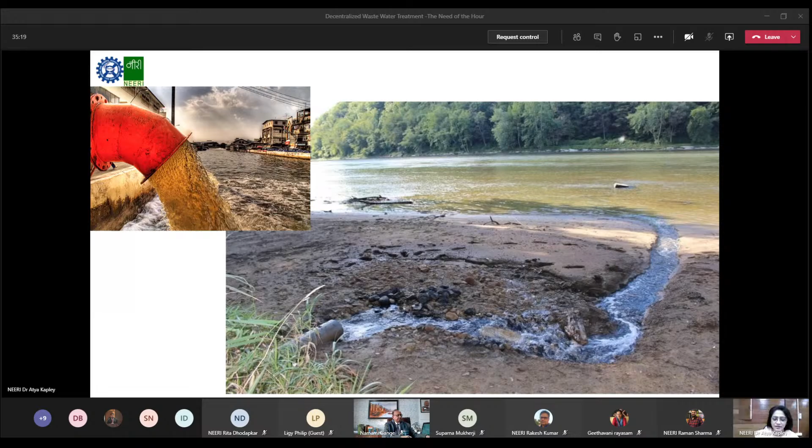But looking at the size, the population, the cost, it's not really a feasible option. And hence, decentralized wastewater treatments are really the need of the hour. We are facing extremely high water stress. We cannot take for granted our drinking water being supplied every day across the country. Some cities are lucky, they get 24/7 water, and in some cities, even the metros get water on alternate days.

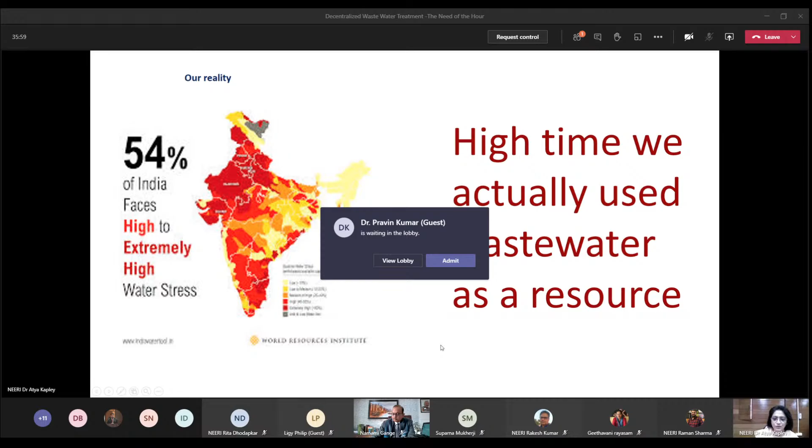So it's really high time that we used wastewater as a resource. Now, this has been used as a buzzword for more than a decade now, wastewater as a resource. But actually taking it into the field is a real big challenge. Now, these are some statistics I got from this website, but it is 2011 data, so I'm sure it is updated now. But you can see from this picture that most of our states do not have enough capacity to treat. Even the ones that we call well managed with wastewater have only a little more than 30%. Nobody has reached even 50%.

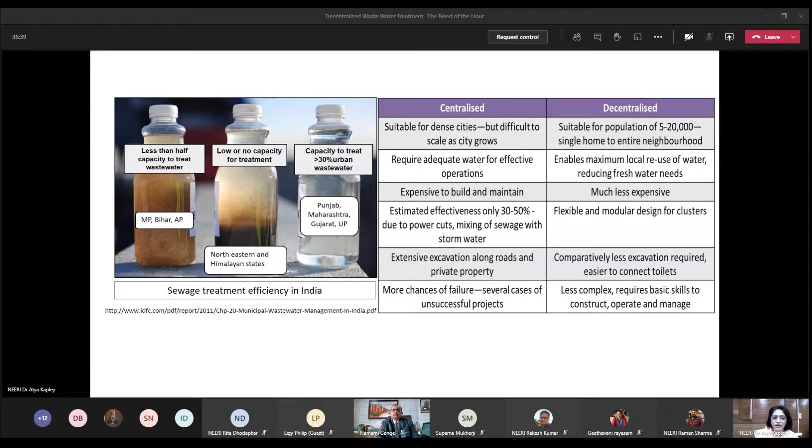You have different variations in pollution loads. When a drain is made for, say, a community, taking this wastewater into the nearest water body, then a new community comes up, a new housing society comes up, and all those channels are attached here. So you have a variation in the pollution level.

Any biologist will be able to tell you that when you're doing bioremediation, there is a particular concentration up to which a biodegradation process can happen. You increase that load and the microbes go on the back foot. It becomes toxic to them. So we need to also deal with variation of the pollution load. Cost is extremely important. We need to have a system that is low in operation and maintenance.

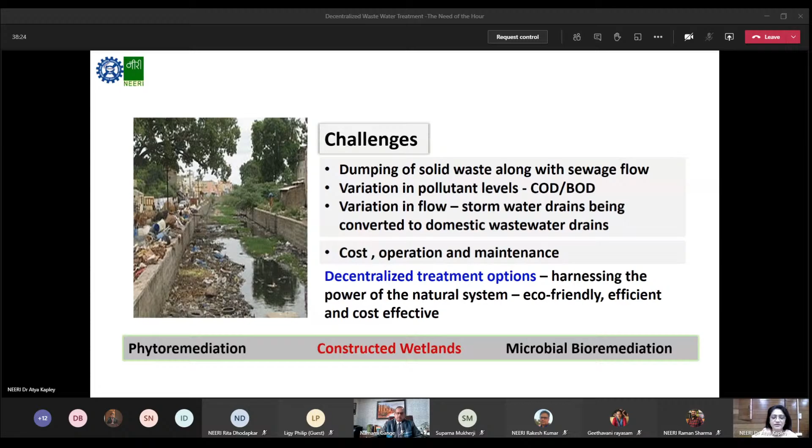There are three popular decentralized treatment options that we are following. When I say we, I mean that are popular in India. One is phytoremediation, the other is microbial bioremediation, and the best option today is the constructed wetland system. But each of them has different drawbacks. Basically, any biological system needs a certain contact time. So retention time will be very high when you talk of microbial bioremediation.

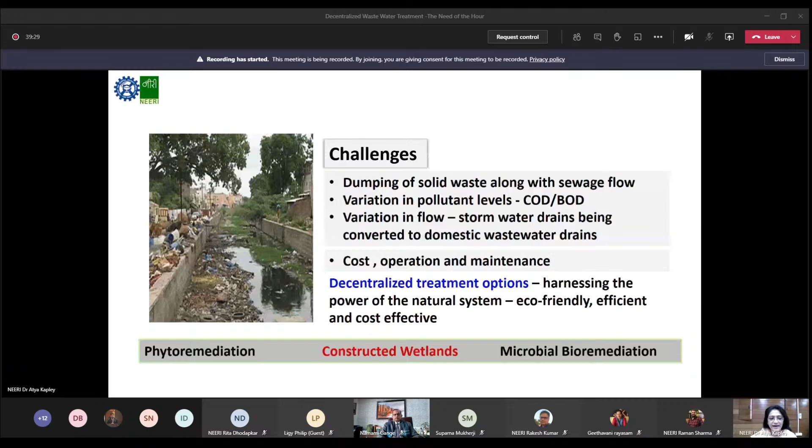If you talk of phytoremediation, then again, time is a crucial factor. Harvesting the plants and making sure that they are in working condition is also something. Biodegradation is a very important process that goes very slowly. So today, the very popular method in use is constructed wetlands. The drawback here is that it needs a huge amount of space. You can use this kind of system in places outside the city, but within the urban space, constructed wetlands have their drawbacks. And so NEERI has come up with a combination approach.

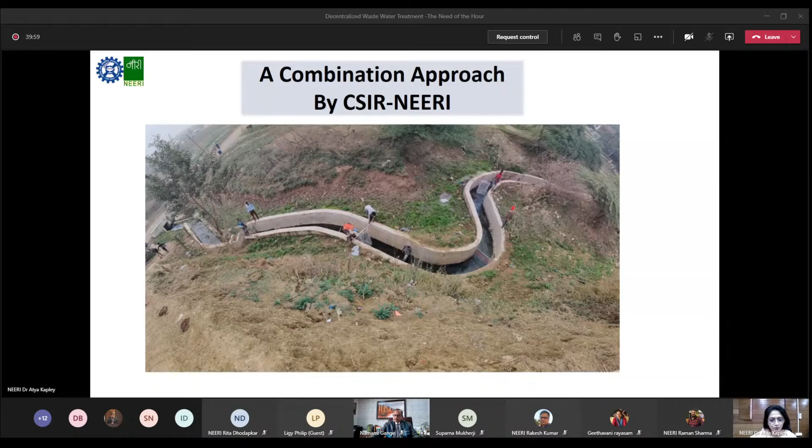We have used all the engineering tools that an STP uses along with our biological remediation parameters. You can see what we do. We make this into a pakka drain, and you can see the workers installing different modules. So we have different modules within this flowing drain. We don't take up any extra space here, and as the water flows, it keeps getting treated. So this is our technology called Renew. Like Raman told you, it's the restoration of nalas with ecological units.

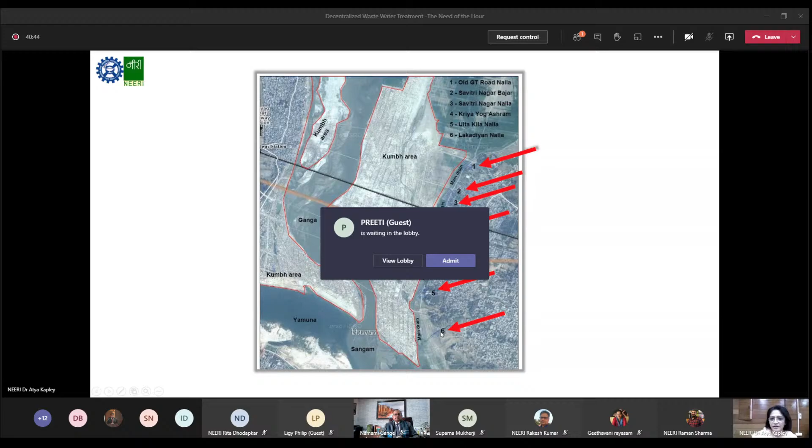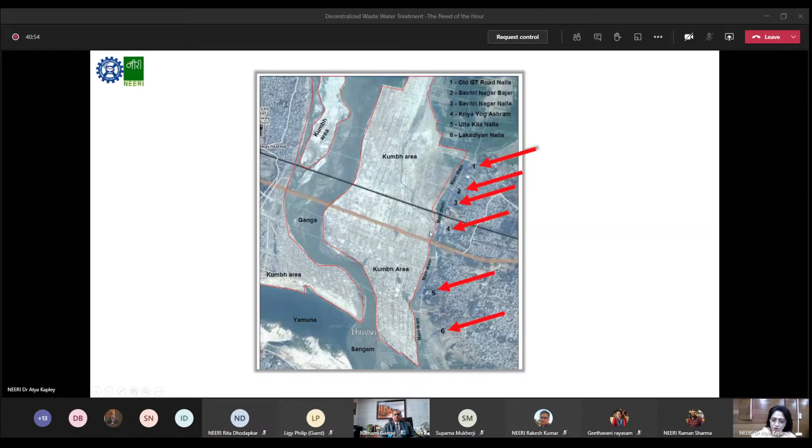We had the privilege of taking this technology to the field. We implemented it at Prayagraj, earlier called Allahabad, in readiness for the Kumbh Mela of 2019. The red arrows show you the position of our drains, just opposite the Kumbh camp, and all the water from these drains was going into the Sangam point, which is the holy bathing site for all the pilgrims. So it was very essential that we treat this water before it joins the main drain, which leads into the Sangam point.

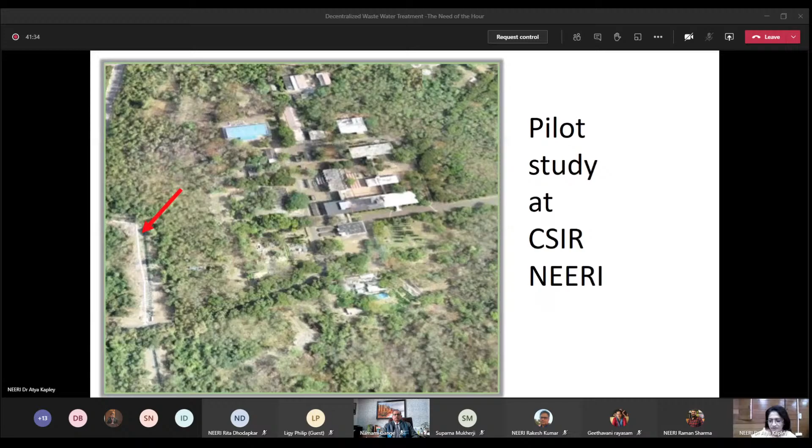But our journey did not start there. Our journey started with a pilot study at our NEERI campus. This is a drone view of our campus, and in the corner you can see where I put this red arrow. This used to be a stormwater drain until the municipality suddenly one day decided that the nearby localities' sewage would go through it, and so it became a normal sewage drain. We started our work here. We incorporated all our different units into it, first did a pilot study, which was really nice, and then we wanted to check its performance.

So we used metagenomic tools. Basically, in a biodegradation process, it's the biological component that is responsible for carrying out the biodegradation. So for each of our units, we got out the DNA sample and did a metagenome analysis to look at the taxonomy, the function, the stress response, and the basic idea was to add a new dimension to wastewater treatment. So all the different units that the water flows through during the treatment were analyzed.

What we saw was that towards the outlet, we are getting more anaerobic bacteria abundance. Actually, we would have preferred it to be higher up in our treatment, towards the inlet near the sedimentation tank, because when you have anaerobic bacteria at the outlet, they give out a characteristic smell from anaerobic biodegradation.

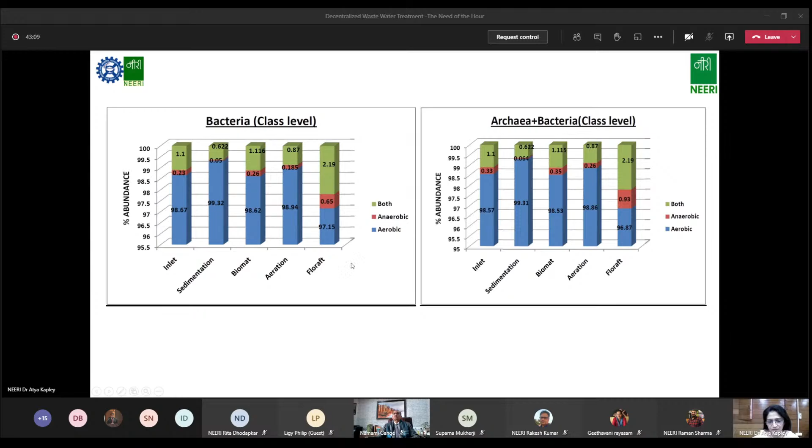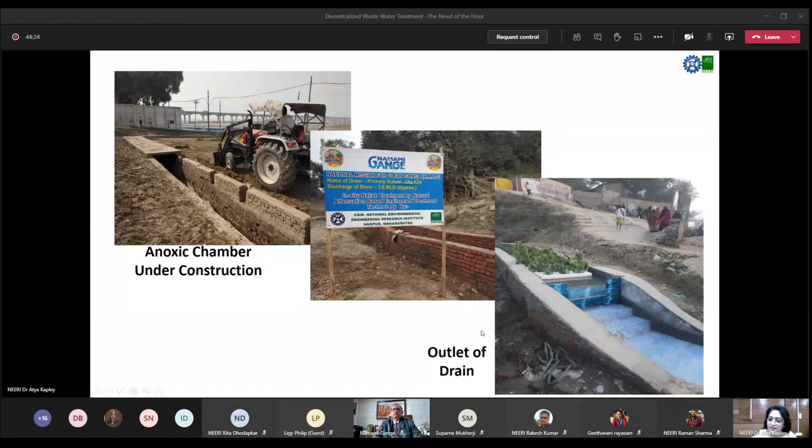This water was so clean that the pilgrims who could not afford to go into the camping site, and who had made little camps of their own across the banks here, were actually starting to use this water. So we had to station a guard there to tell them that this is still drain water, not to be used, not to be mistaken. But that was the level of efficiency that we could achieve.

What our treatment system does is deal with the floating garbage. Like I told you, this is a serious problem in all our drains. We have screens and traps like this to address that. The suspended solids and floating matter are settled in the sedimentation tank, and the biodegradation process happens in two stages. Normally the aeration process goes first, but we put the anoxic chamber first because the anaerobic degradation process generates a lesser amount of sludge than the aeration process. And we also want the water to be clear of suspended solids.

So we do biodegradation in an anoxic chamber, and we do solar diffused aeration, so we don't use electricity. We have solar panels linked to pumps and compressors, and through those we lay pipes into the treatment process, where they create bubbling. We do microbial bioremediation by using these biomats. You can see that they are suspended with wires. We have our immobilized bacterial consortia in a matrix inside this, which we put into the tank, so that as the water flows, it comes in contact.

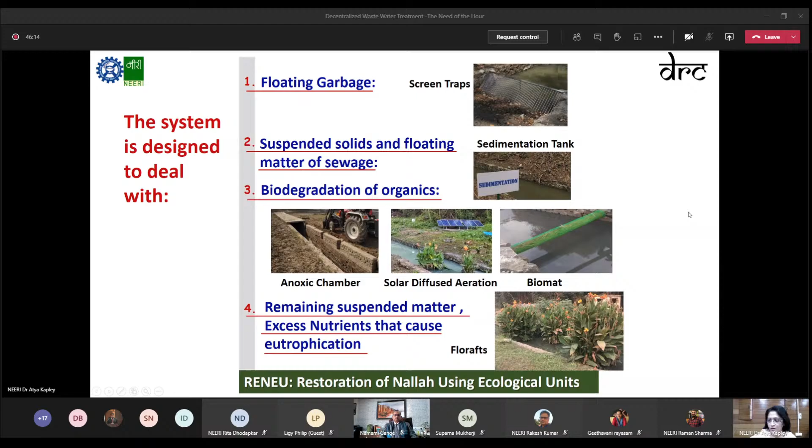It also acts as another step of filtration, plus the bacteria carry out the bioremediation. And the excess nutrients that are causing eutrophication are taken care of by our florafts, floating rafts with wetland plants, which also give it an aesthetic look. So this is what RENEU is about.

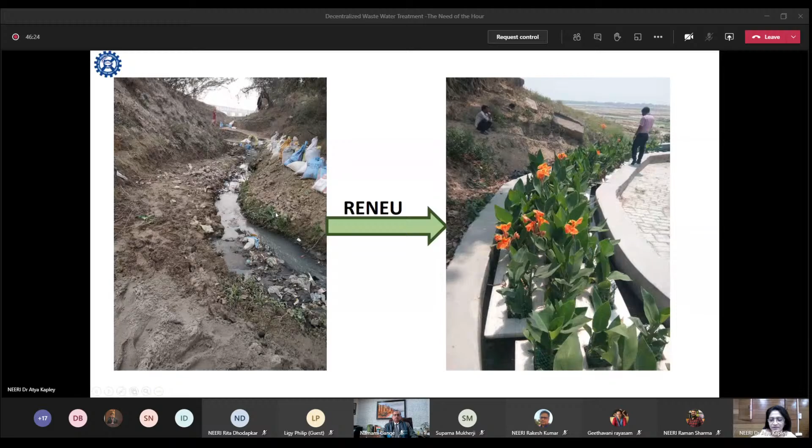This was what the drains looked like when we went to Allahabad, Prayagraj. This is what we converted them into. And it's not just the aesthetics. If you look at the inlet and outlet, you can see a very clear, distinct improvement of the drain water. Not only was it cleared, it also met all the norms required for BOD, COD and suspended solids. All this analysis was not done by us but by a third party. IITR was involved in this project, and they actually measured all our drains.

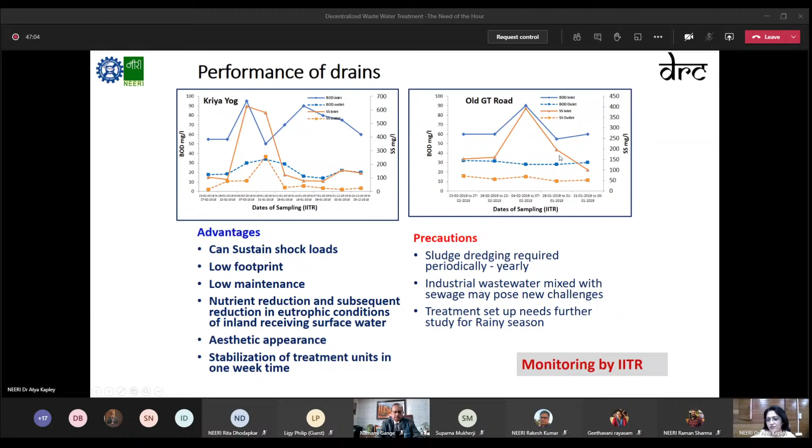The dotted lines show you the efficiency that we have achieved from what were the inlets. We also looked at the degradative potential. The parameters measured mostly by the CPCB, or anybody measuring wastewater characteristics, are always BOD and COD. The biological component of BOD and COD is actually taken care of by the degradative genes present in your treatment system. So we monitored the degradative genes in all the different units, and you can see that we have all the genetic makeup for biodegradation.

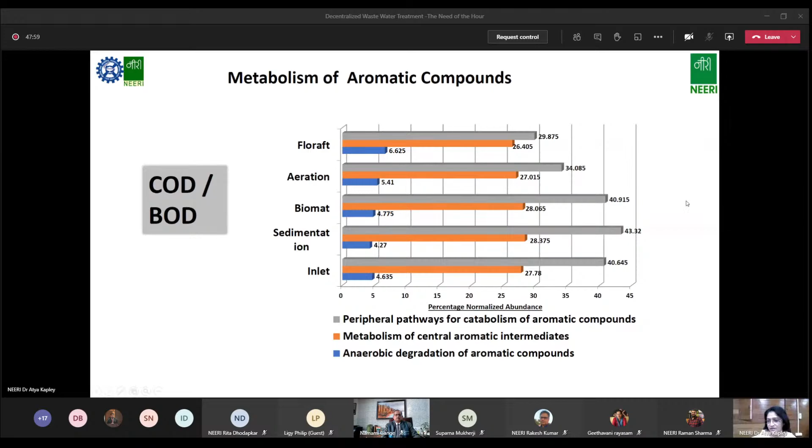The peripheral pathways are responsible for taking any aromatic compound into the central aromatic pathway, where it is cleaved and biodegradation happens. And we also have very good anaerobic degradation represented in our system. The two main nutrients in sewage are nitrogen and phosphorus, and the excess of these nutrients actually causes eutrophication. So we also monitored these genes in all the treatment units of our ReNeU.

And for nitrogen, you can see that allantoin utilization is one of the major genes. The gene responsible is one of the major factors. It is associated with nitrogen uptake in root nodules. So we have a phytoremediation system which is apparently working very well.

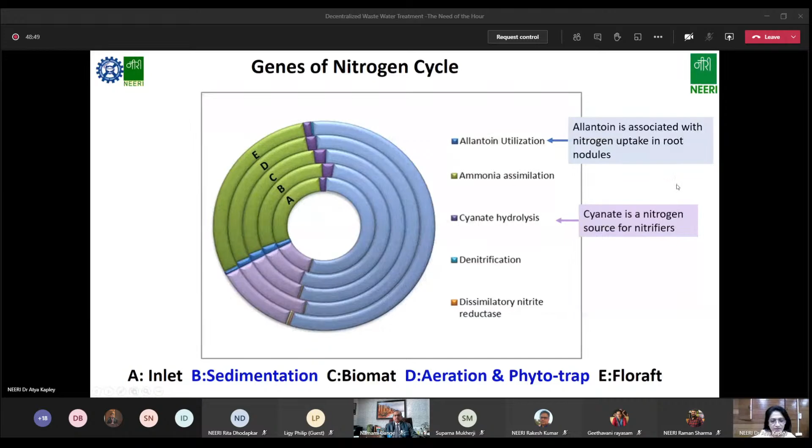And similarly, we could map different kinds. I'm not showing you the phosphate. This is just to give you an idea. So that is what our treatment system is about. But since we already had the metagenome data, we also looked at the presence of the multi-drug resistant genes.

And this is something that I would really like to underline. All our wastewater quality is being monitored on the basis of COD, BOD, nitrogen, TSS, but nobody is looking at this, the presence of the multi-drug resistance, the increase of multi-drug resistance in all untreated water, which is going into our natural bodies. This is actually a looming health threat sitting on our heads and really needs to be addressed.

You can see from my previous graphs that all the parameters have shown a very good decrease. The efficiency of treatment was really nice. But the multi-drug resistant genes do not show any change in their abundance from the inlet to the outlet.

So it is something that, as a scientist and as a scientific institute, we need to create an awareness. This is why I have added this slide actually, to create an awareness that we are overlooking this very important aspect in all our wastewater treatment systems. We need to actually ensure that this is not reaching the natural environment, or we have the next COVID sitting on our heads.

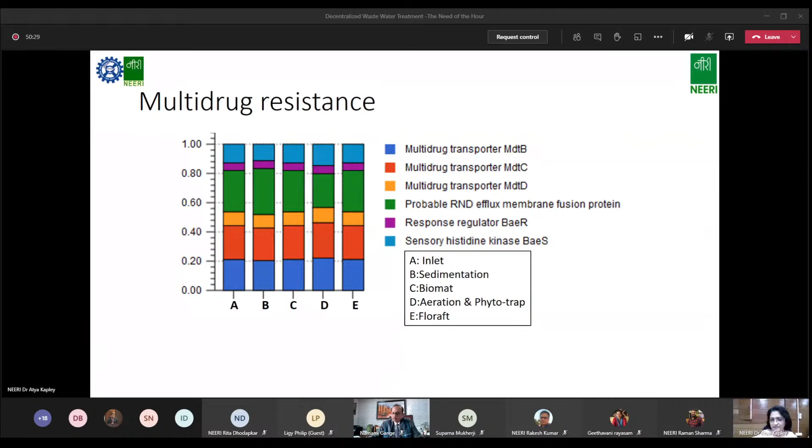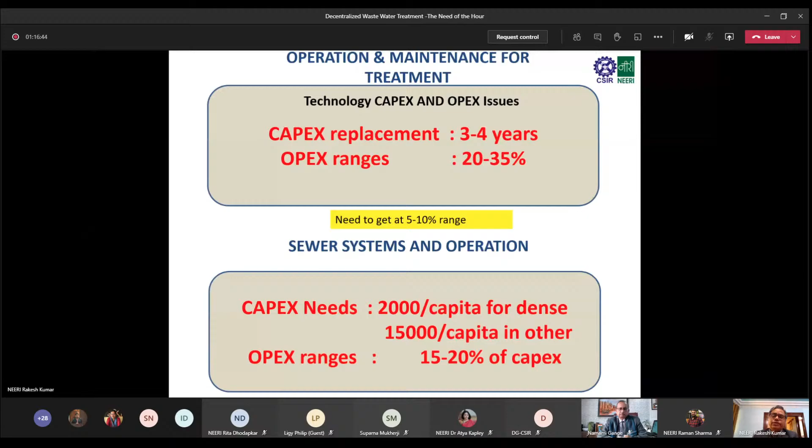So in place of typical deep sewer designs, which are conventional CPHEEO manual based or civil engineering based, can we not think of something called a shallow sewer system, which is nothing but a 1 to 1.5 meter depth based sewer system which flows and which is easy to clean up? This will bring the operational cost into the range of about 15 to 20% or below. Particularly for sewer systems in villages, it will be able to save a lot of money and it can get cleaned much faster.

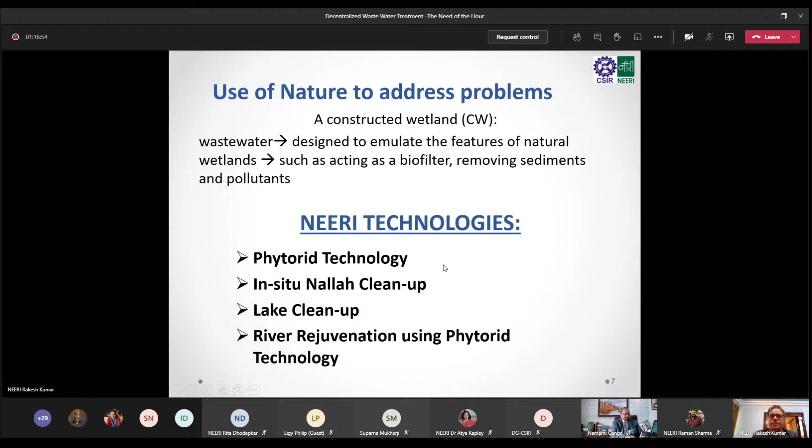Constructed wetlands all got discussed. We worked out phytorid technology for sewage way back about 10-12 years ago. Now it's very popular. In situ nala, you heard. We have started doing a lot of work on lake cleanup, because most of these water bodies are in deep trouble in terms of the misuse or disuse that we are very used to, and on river rejuvenation using some of these. Just a few pictures of how the phytorid system works.

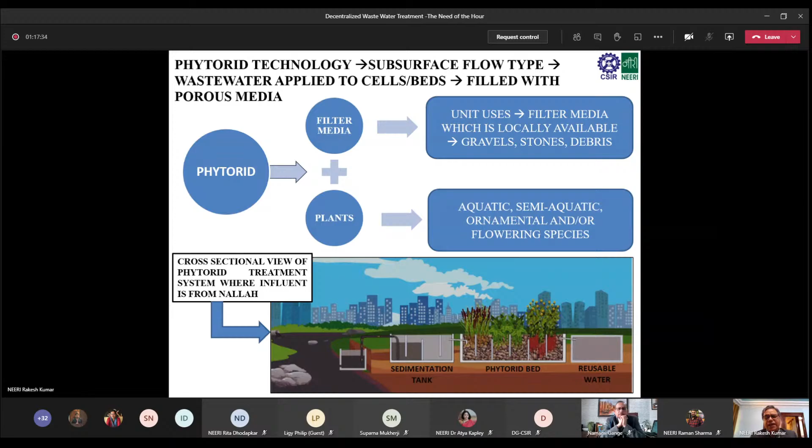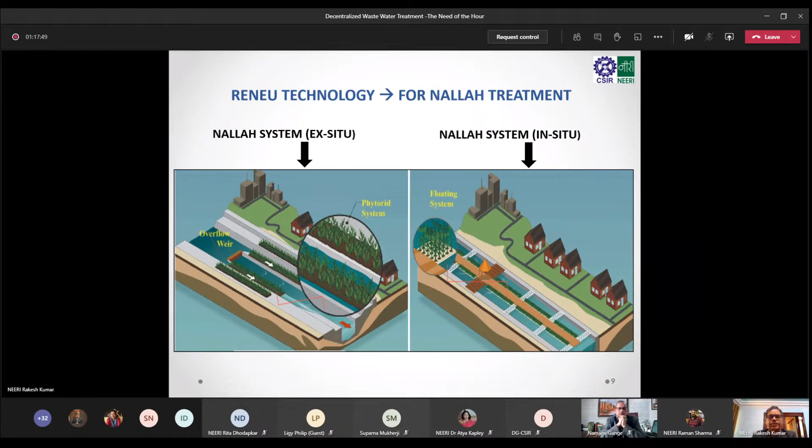Basically, it is nothing but a trickling filter in horizontal form plus plantations whose root systems will clean it up. Now it's advanced enough that we can have a complete sensor system, so you don't have to have a person sitting there running the system. This was shown already by Dr. Atya Kapley. This can be done ex situ as well as in situ. What was shown to all of us was in situ, but if there is a possibility, one can also do ex situ.

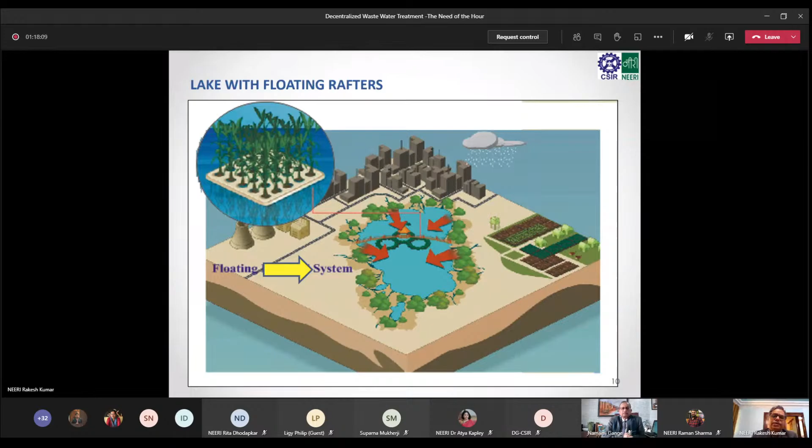We have also experimented with floating rafts where we put certain kinds of plants which effectively take up nitrogen and phosphorus and put them in the lake, so that over a period of time your nutrients are removed and your algal bloom problems are sorted out. Using that, we created a project, and last year it became operational. Telibandha lake has now been cleaned up using this method, and this was actually implemented through the BHEL team at the Raipur Smart City project.

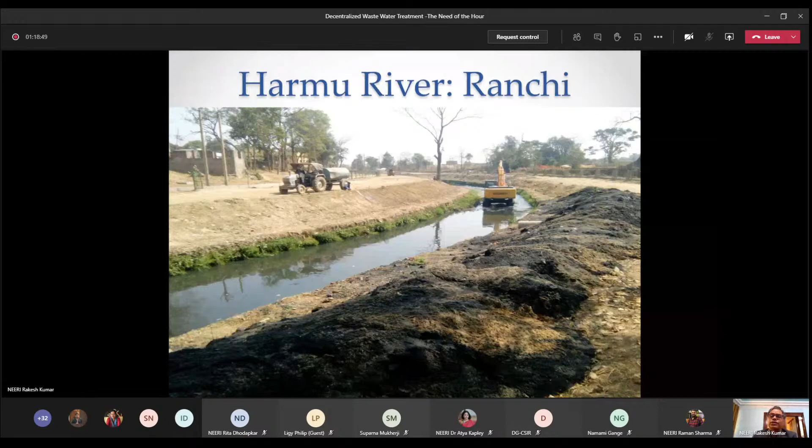Another project is Harmu River rejuvenation in Ranchi, where we used a combination of phytorid systems to clean up this small but very stormy river, since it's in a mountainous region and its flow is very high during rains. Water was picked up from different locations, cleaned, and then put back into the river.

Lastly, a few points on knowledge to action. Sanitation and employment are getting linked. It's no longer true that only so-called Safai Karamcharis should do this kind of work. There's a distinct possibility of blue-collar jobs through good quality water recovery, providing benefits that people can feel directly.

Future costs and current expenditure must look at what is sustainable. The numbers indicate that for big cities, a centralized system definitely works, as Mr. Raji pointed out. But for smaller places, we need alternatives that are much easier to handle.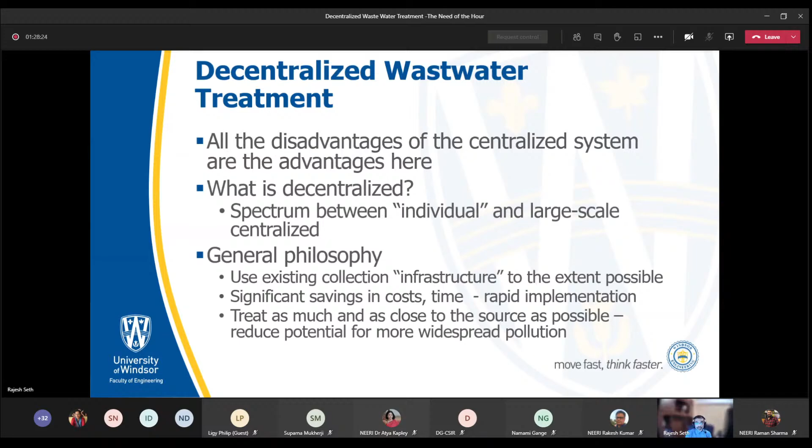The general philosophy is to use what I call existing collection infrastructure - we have our nalas, we have our ponds. The more we can use what is already there, we don't have to put in new collection infrastructure, and we save on time, we save on cost, and the solution can be more rapidly implemented. Also, this idea of treating closer to source makes a lot of sense. The more you are able to treat at source, you reduce the potential for what we call diffuse pollution - pollution spreading and contaminating larger bodies of water.

So it is not new science. The philosophy used for decentralized is very similar to centralized treatment. The science is very similar, the science is very sound, and it has been demonstrated.

Things that can work: source control. I don't know why septic systems have lost favor in India - they are good systems, right? So there is a whole slew of solutions. There is no one solution, as Dr. Mishra pointed out as well. There is a spectrum of solutions that are possible.

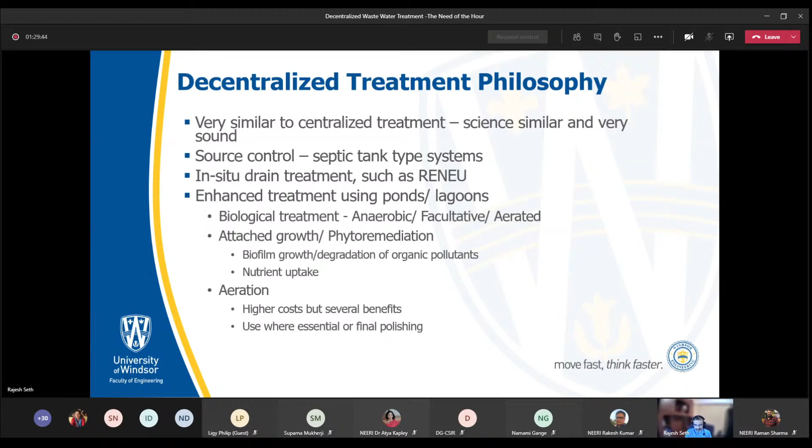The in-situ drain treatment that received the award, rightly so, points to other systems using existing ponds, building lagoons, for example, using biological treatment processes - anaerobic, facultative, aerated, attached growth, phytoremediation. Again, a lot of work done by NEERI, and all of those make sense. Aeration in particular can be useful; however, it has costs associated with it. So where needed, we can look at providing aeration.

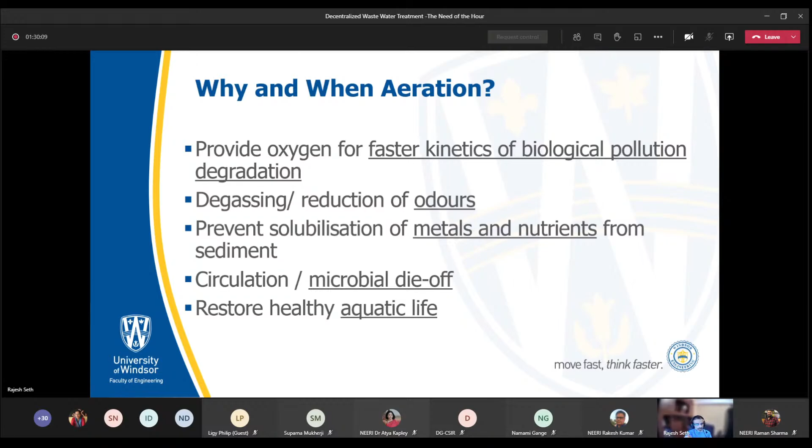When and why provide aeration? Well, aeration improves the kinetics of degradation. So where the time is limited and we want a faster rate of treatment, then we provide aeration. Aeration also reduces problems of odors, solubilization of metals and nutrients, microbial die-off, aquatic life, and all those other benefits.

A comment about Atmanirbhar Bharat. I would certainly like to see a country like my home country, India, be self-reliant. But my definition of self-reliance is in a global sense, that's how everybody is doing it, right? So it does not mean that we need to do everything in India, but the way I see it is we have a priority: we should maximize use of made in India products.

If there are unique international products that are useful on a cost benefit analysis, we certainly should look at them, but making sure that there is assured supply and sourcing. Installation, operation, maintenance should be doable by people in India, easy to operate and maintain.

And finally, something else that Director NEERI also alluded to, we have to make connections. So wastewater treatment, connecting with community engagement and employment opportunities is a needed thing. Something I will not dwell on, but since we are talking about CSIR, this project that I was involved in...

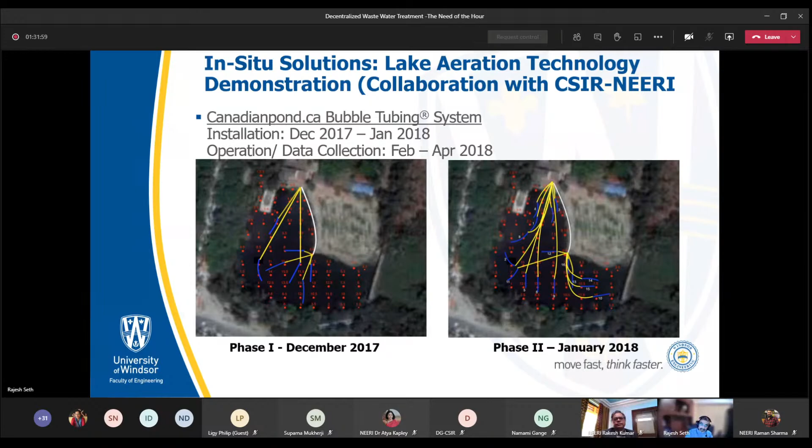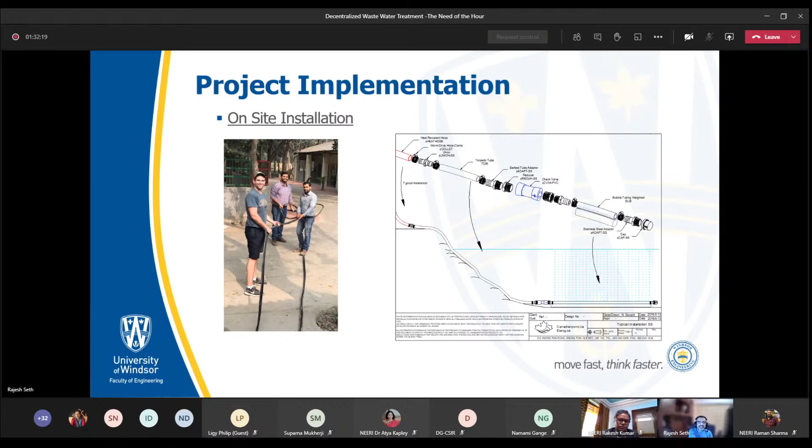This was a demonstration of an aeration system done in collaboration with CSIR NEERI and the Delhi Zonal Laboratory in particular. So I'm sharing a few pictures, it is just to make that connection, that if there is something that works well and can be implemented, that is the idea here. And by the way, you do see Dr. Sharma in that picture there.

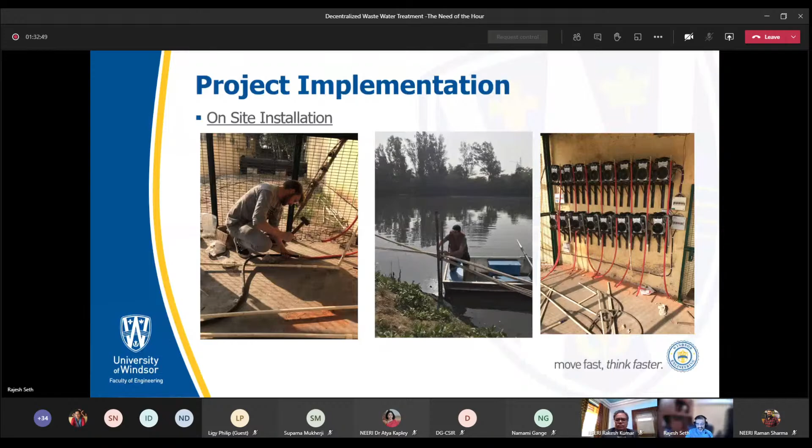Talking about the project, we used bubble tubing. It's a Canadian product. These pumps are from France. Everything else is what one of my students used to call jugaad, right? So we used jugaad to use anything that is possibly available in India to make things work, and we did.

So what's the problem? Well, it's a good question, right? Certainly it's not the science. There is sound science, there is sound talent in India, but still things are not working. So it is important to have these conversations like the one we are having. While we work on finding solutions, we also have to look at, is there something different that we can do? How can we make a difference? Have we thought of everything? Can we involve others?

And again, I keep coming back: there is a very, very important need for community engagement. Connecting people with water is of utmost importance. Again, our small efforts with community engagement, and this is not by design.

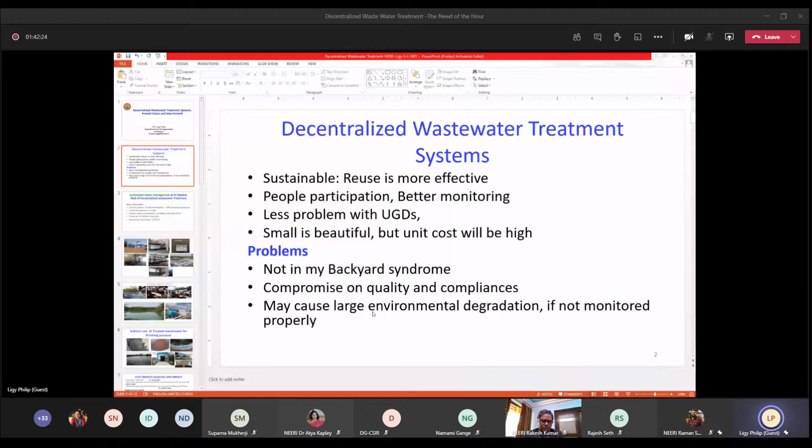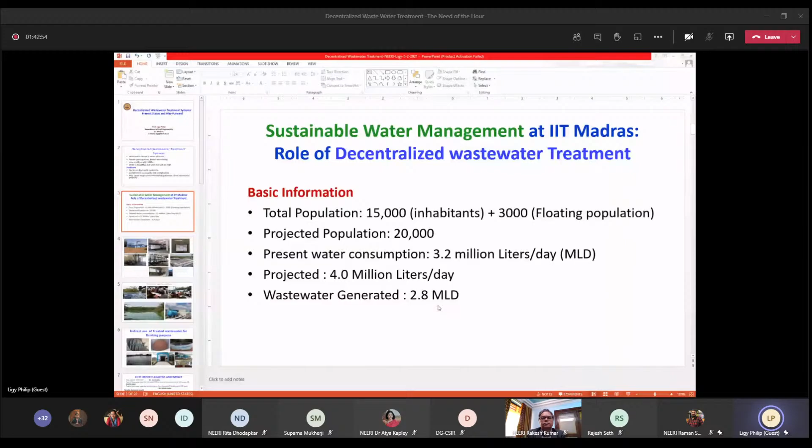So before going into the status, I will just talk 2 minutes about sustainable water management at IIT Madras and the role of decentralized wastewater treatment. The basic information: our population is around 15,000 with 3,000 floating population, projected population is around 20,000, present water consumption is around 3.2 and projected is 4 million liters, and wastewater generated at this time is around 2.8 MLD.

And you know that Chennai is a water scarce area, and we always have water problems. So like any other campus, we have put a state-of-the-art wastewater treatment system, a 4 MLD SBR system. But because water is so precious for us, we thought we should not waste a single drop of water from the campus. So what we did is, we have done the tertiary treatment system.

We have an ultrafiltration system, ozonation, carbon filter, etc. And the SBR is working on the extended aeration process, so we are getting stabilized sludge. We are using it for our horticulture purpose.

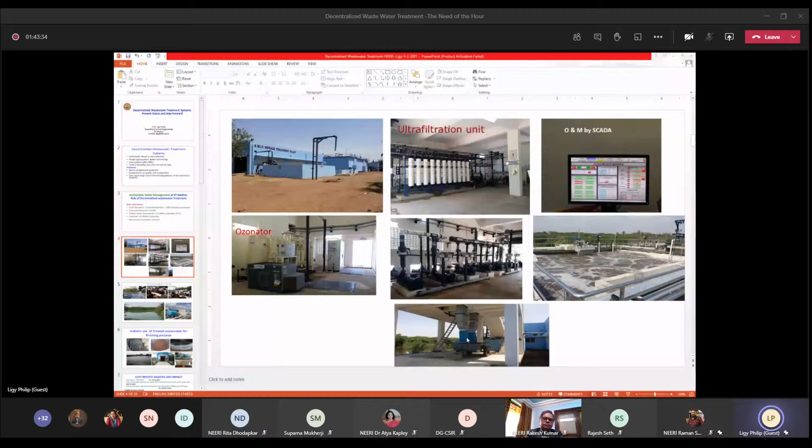And what we have done is, we have put a dual pipeline system in our entire campus. Not a single toilet is using fresh water. And the quality of water is so good, people are not even able to identify which is the treated wastewater and which is the RO water.

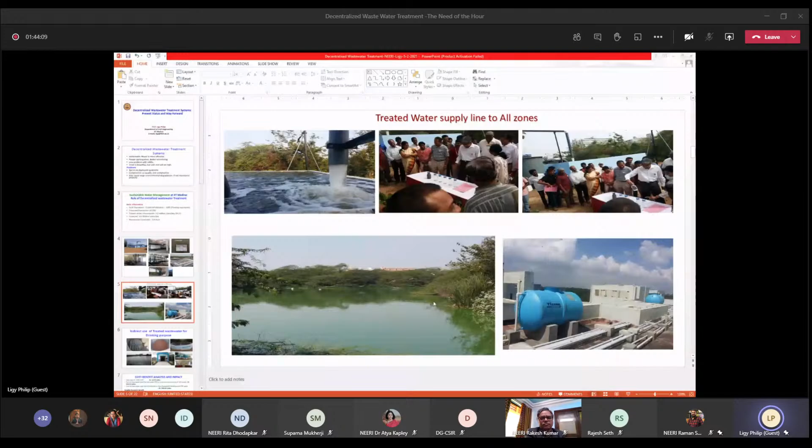And some water we are using for replenishing our pond system, so that it will be supporting the flora and fauna. And all other water after the tertiary treatment, we are using it for flushing purpose, gardening, and air conditioning cooling water. Not only that, still we are left with some water.

So what we have done is, after the tertiary treatment, including the activated carbon and ultrafiltration, we have made a filtration well. This is around a 3 meter deep sand bed, and you can see that this is the bottom of the filtration well. Whatever excess treated wastewater we have, we are trickling through this one, and we are storing in our lake.

We have deepened the lake so that the storage capacity is very high, and we can store a huge quantity of water. The treated water and all the rainwater falling on the campus, we are collecting in this lake, and we put up a water treatment system there. It has a capacity of 0.8 MLD.

So here what we are doing is direct filtration. That means we are adding a little bit of alum, then filtration, then activated carbon adsorption, then chlorination. That is the treatment we are giving, and we are mixing this water along with the water coming from CMWSSB for our regular purpose.

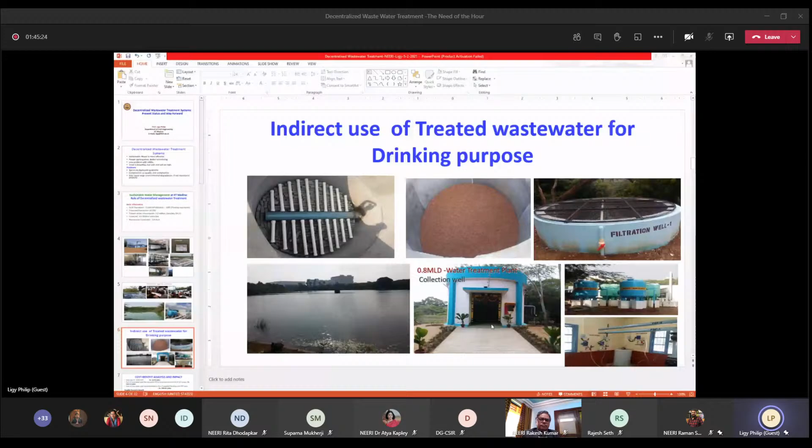So if you see, we are saving more than 2.5 crore on the water bill after taking care of all other expenditure for the wastewater management system. And whenever Chennai city was facing water scarcity, we never faced water scarcity. And there are so many other intangible benefits. And definitely there was an impact.

Chennai Metro Water and Sewerage Board is planning to recycle the water for domestic supply. Already industries are using the recycled water. They have constructed two 10 MLD plants, exactly the same thing what we have done at IIT Madras, and they are planning to put up another 260 MLD recycling system, and we are giving the technical advice.

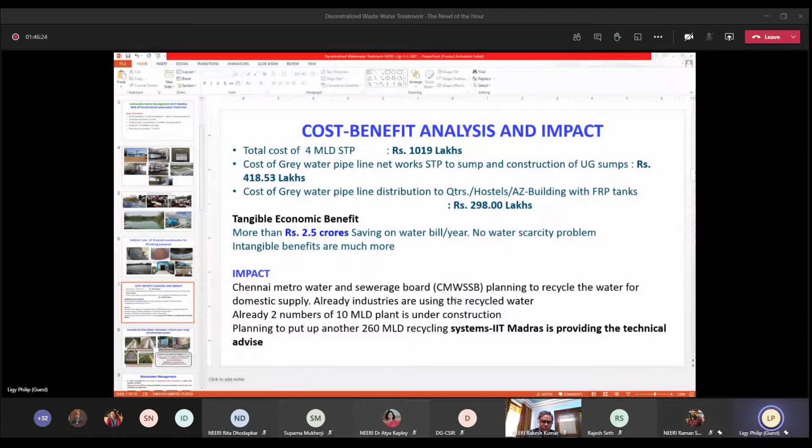So this is one way we can manage the water, sustainable management of water by employing this decentralized wastewater treatment system. Now coming to the next system, how can we treat or manage the wastewater in peri-urban or rural areas? This is the work we have done in a panchayat just outskirts of Chennai city. The panchayat name is Vichur. We are taking care of around 850 families in that panchayat.

So what we have done is, it is a panchayat, they didn't have any drain. So we put the drainage system, and they had a water body. We cleaned the water body so that whatever rainwater is coming, everything will be collected through this drain and goes to the water body. And as we all know, in the peri-urban areas there is no sewer system.

So whatever wastewater is generated, except from the toilet, everything comes out, either ponding on the roadside or in their premises. So as and when the rain comes, everything gets mixed up and your water bodies are getting contaminated. So what we have done is, we have provided a small bore system. This will be carrying only settled wastewater, no solids here.

You can see here the wastewater coming from the bathroom, kitchen, washing basin and all comes to a chamber. If any solid is there, it will be collected here. And we also collect the septic tank effluent. After this chamber, it gets into the small bore system. You can see that one. It is a PVC pipe and it is flowing full. So the cost is very, very minimal.

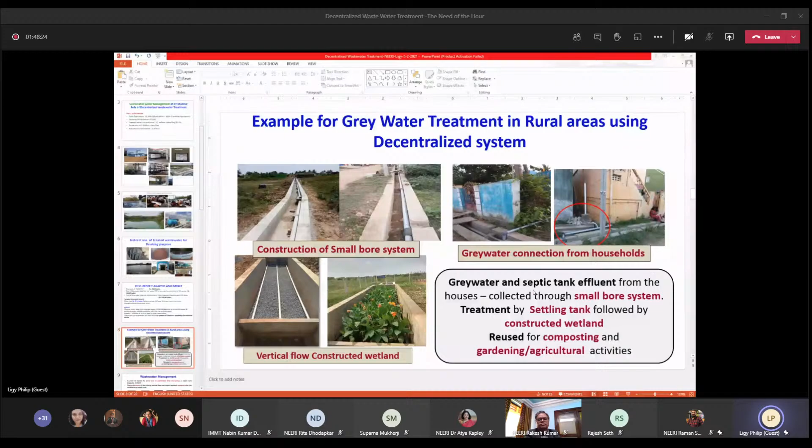Then we are taking it to a constructed wetland for the treatment. As the load increased to around 850 families, we didn't have enough space for the constructed wetland. So we have put an Imhoff type of septic tank, followed by a constructed wetland, which has given very good treatment efficiency. So this is the 3-chambered septic tank, followed by the constructed wetland.

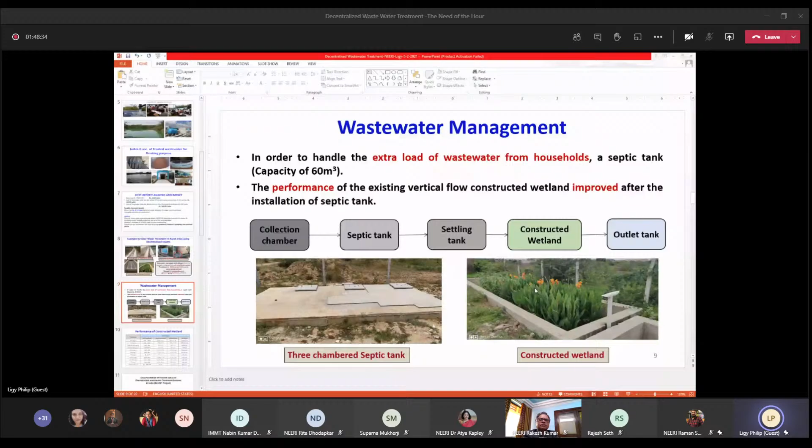I can show you, this is in the field, and this is the performance. For the last 4 years it is working, and we are also monitoring all the emerging contaminants, and we could see that the removal efficiency varies between 70 to 95% depending upon the pollutant. So yes, either rural or urban, we can treat the wastewater using the decentralized wastewater treatment system.

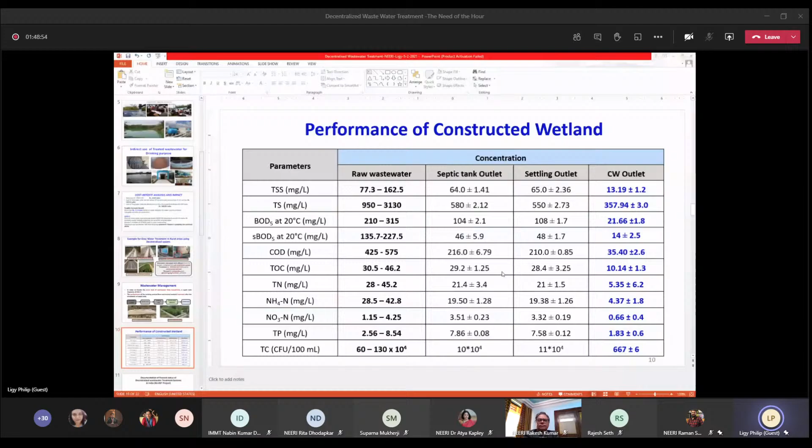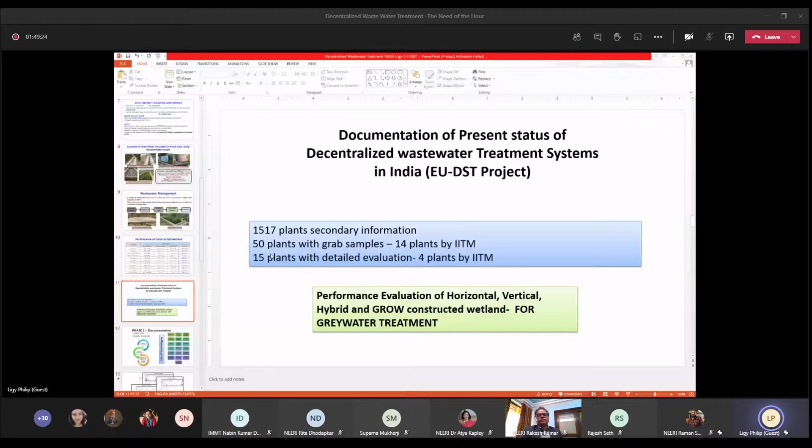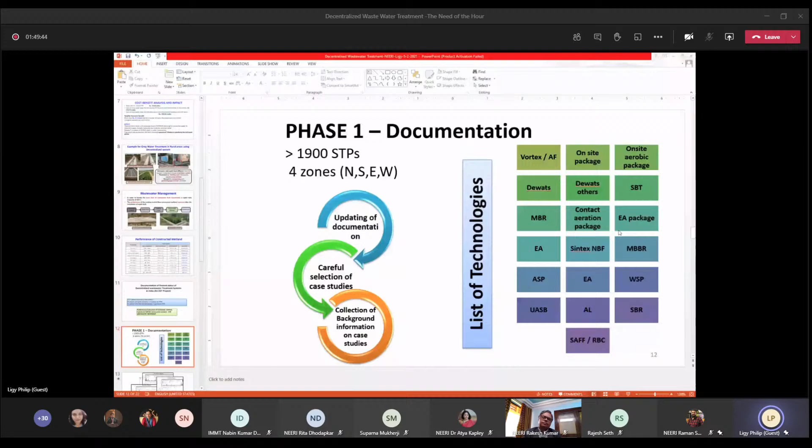And if you see, technology is not a problem. All types of technologies are available in decentralized systems, starting from anaerobic filter, DEWATS, MBR, EA, ASP, UASB. So any technology you mention, everything is there. So technology is not the problem, and people are aware of that. They are implementing. And if you see, the eastern region and northern region,

this is the number available based upon various technologies. And this is western region; the number is higher compared to northern region. And this is the status of eastern region, and this is the status of southern region. Southern region is having much more number compared to northern region.

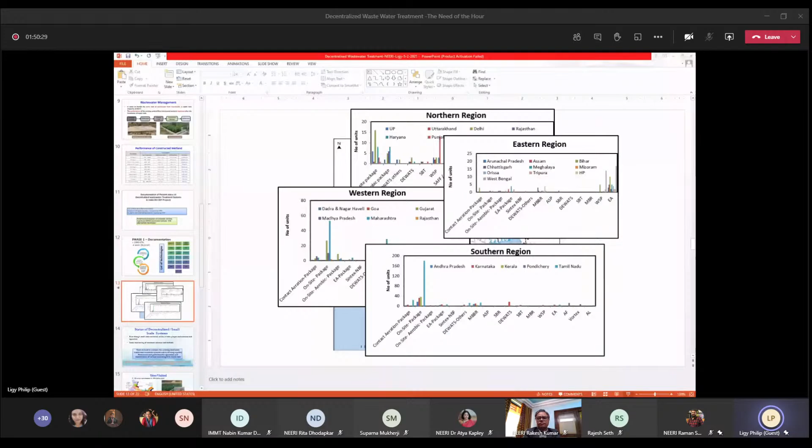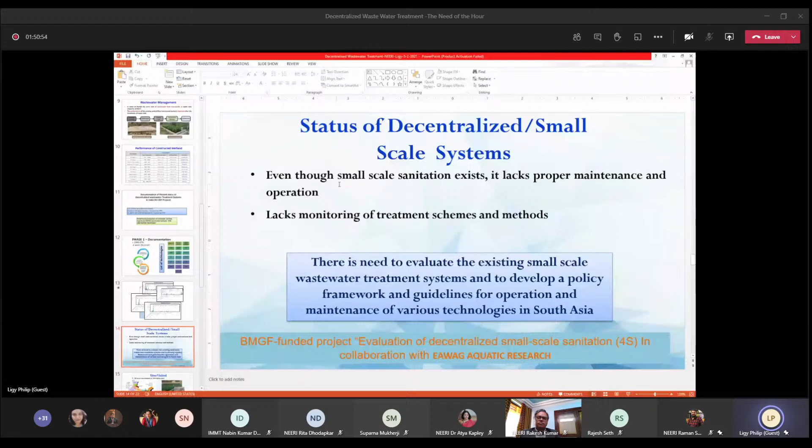So we have done the evaluation studies, and recently we have undertaken another study to find out the status of decentralized or small scale treatment systems. This was funded by Gates Foundation, and we did the study in collaboration with Eawag Aquatic Research Center. Because not much data was available, that's why we have undertaken this study. So we have done elaborate monitoring of 150 units. For 2 years we did composite sampling, we analyzed all the technologies, and we did a survey to understand the operation, maintenance, capex, etc.

So main conclusion: small scale sewage treatment plants serving between 10 to 1,000 households are existing in large number. There are around 20,000 such systems in operation in India. And we were finding out, are they a viable alternative to centralized systems, whether they are cost effective, flexible, whether modular systems are available, what is the technical, financial and environmental performance of the existing small scale treatment systems, and what determines the success or failure of such systems.

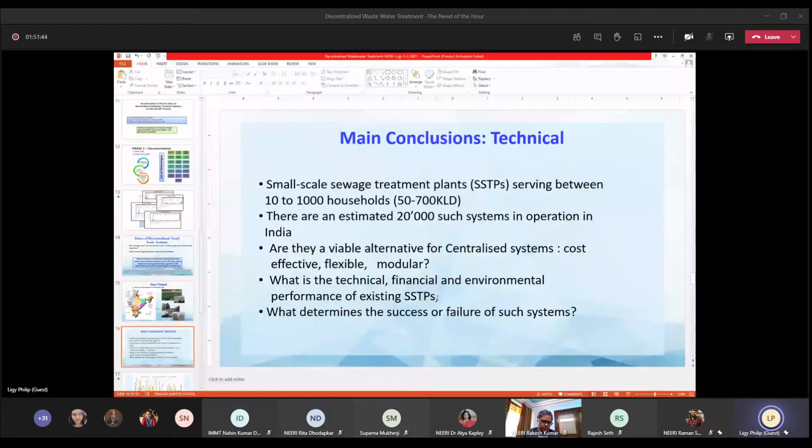And if you see, I'm not going into the details, with respect to biochemical oxygen demand removal, some plants are having around 90-95% efficiency, but it is varying between 70 and 95, on average around 80-85% removal efficiency. That is about organic. When we talk about total nitrogen, the removal efficiency is very, very less, because most of these plants are looking only for organic matter removal. You can see that for total nitrogen removal, except a few technologies, others are not able to meet the standard with respect to total nitrogen and phosphorus.

And when it comes to fecal coliform, almost all the plants are having the disinfection system, but many of the plants are not performing well. You can see it in the other side of the graph. The reason is your BOD value or organic content coming in the effluent is very high, so whatever chlorine dose you are adding is not sufficient to disinfect the water. So this is the quality.

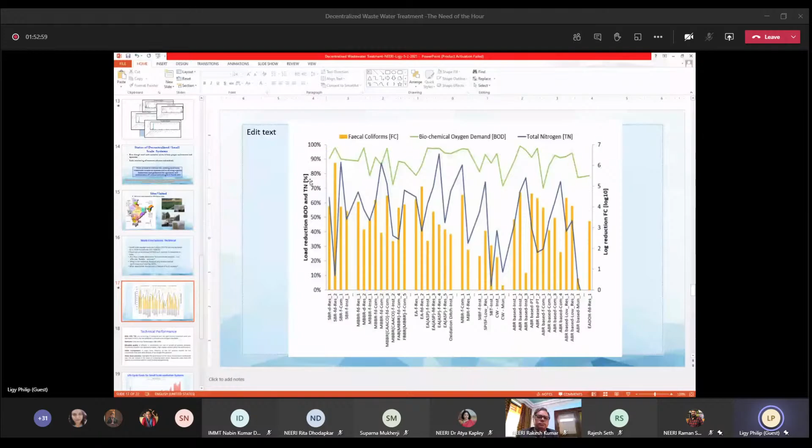So BOD, COD, TSS: any technology combined with the right tertiary treatment units and operated correctly has the potential to achieve quite stringent standards. No doubt about it. Nutrients: only very few technologies like SBR and MBR are able to meet them, not talking about constructed wetland. Constructed wetland in some places was able to meet them. And microbial quality of the effluent is consistently not met in almost all the systems analyzed. Disinfection systems are not operated properly. High organic content affects the performance.

A major issue is the solids management. The majority of the small scale sanitation systems studied do not consistently treat and safely dispose of the sludge they produce. Water reuse practice highlights the good impact of the water reuse policies established over the last decade in the wake of increasing water stress. Reclaimed water from small scale sanitation systems is used commonly for toilet flushing and gardening.

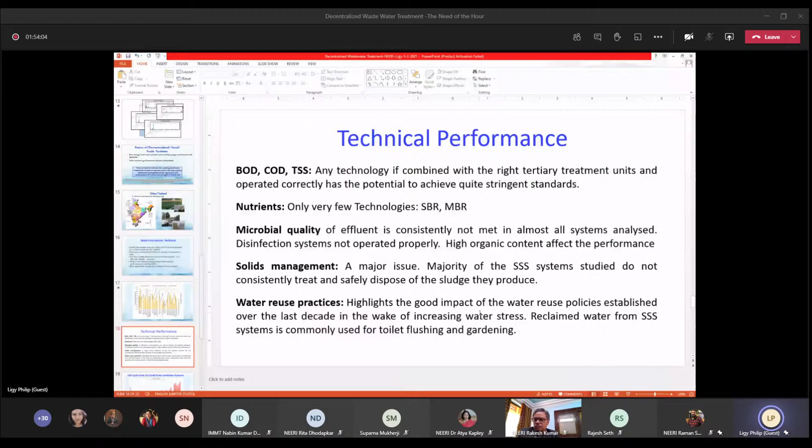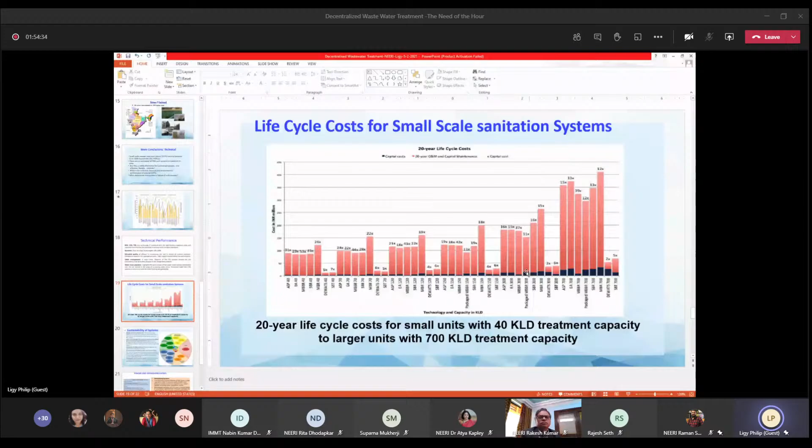Then we also looked into the life cycle cost for small scale sanitation systems. A lifespan of 20 years we have taken, and the size we considered here is 40 KLD to 700 KLD. So depending upon the technology, we have put what is the capital cost, 20-year O&M cost, etc. So you can see how it is coming. For some technologies the O&M cost is very high; for others it is not that high.

But when we talk about the sustainability of these systems, many places, people were talking about startup and handover. Many places the contractor will construct the plant, but they will not be talking about how the plant is operated, or many times they are not even operating the plant properly before handing over. So that is a very, very major problem.

Another one is skills and knowledge of operation and maintenance personnel and management entities. Operators and managers are often not sufficiently informed about the functioning. Troubleshooting skills are therefore generally weak. Then supervision of O&M activities: operators often are not clearly instructed and supervised. Documentation of O&M activities and financial flows is not documented properly.

The absence of systematic documentation and archiving of information leads to loss of knowledge and understanding of the system performance and history. Such data is crucial for decision making and anticipation of maintenance work. Clear responsibilities for organizing spare parts as well as for planning and budgeting scheduled maintenance services are lacking. Because of this, many of the plants are not functioning properly.

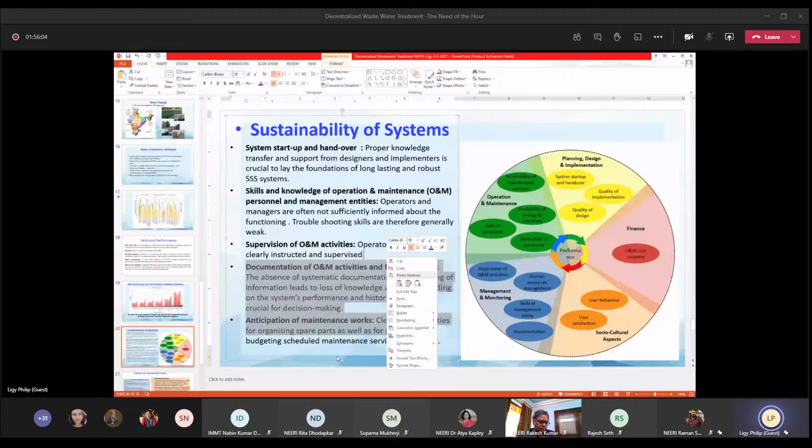And policies and institutional factors are another important thing. Lack of a clear policy framework for small-scale sanitation systems and overlapping jurisdiction of the concerned agencies hamper planning and implementation process. Coordination between the planning, implementing, and monitoring agencies is necessary for better overall functioning of urban wastewater management. Human resources of the responsible agencies have not kept up with rapid expansion of the sector.

Mismatch between supply and demand, that is another thing. And monitoring systems are not proper. The pollution control boards have a clear regulatory role to ensure public health and environmental protection objectives, but they are overloaded. Wastewater samples of STPs are currently tested in accredited laboratories, but most of the time the samples are taken by the system owners themselves and sent to the laboratory, which is not reliable many times.

And many of these plants are having financial issues as a result. The plants are not getting proper attention, and people try to go for minimum CAPEX, which leads to high OPEX. A more realistic approach to financial sustainability is needed. Not only the minimal capital cost; an entire life cycle cost analysis is needed. And another thing is lack of accountability of designers and consultants of small-scale sanitation systems, which results in low-quality installations and failure in long-term operation of newly built systems.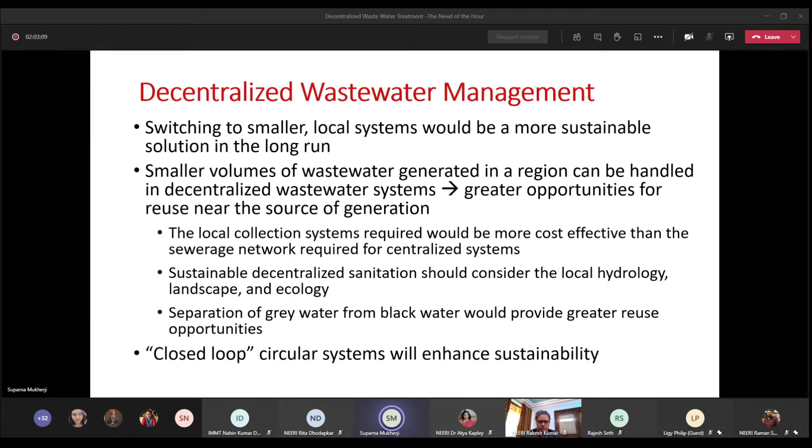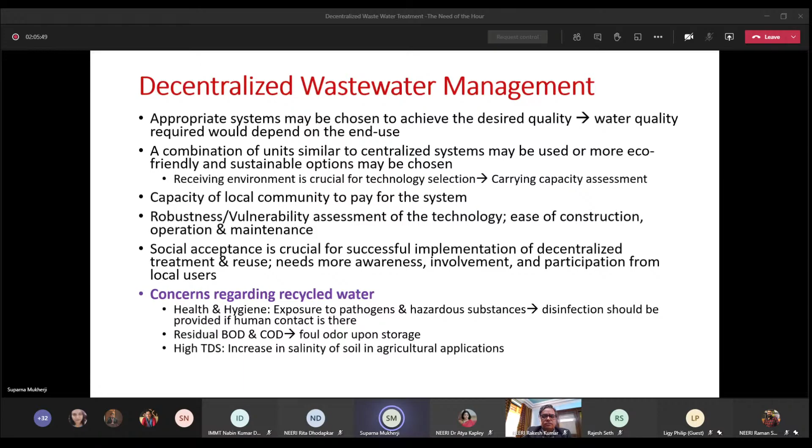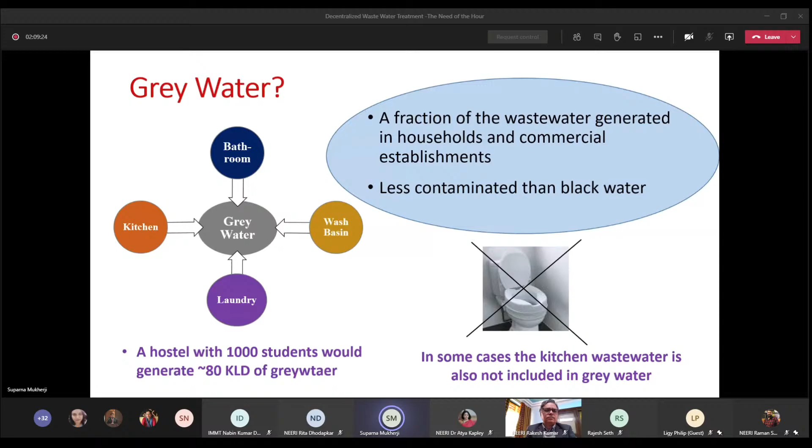So a fraction of the wastewater generated in households and commercial establishments is grey water. It is quite a significant fraction, and it has much less contamination than black water. So a hostel with around 1,000 students would generate about 80 KLD of grey water. This is just to give you an idea of how much is the generation.

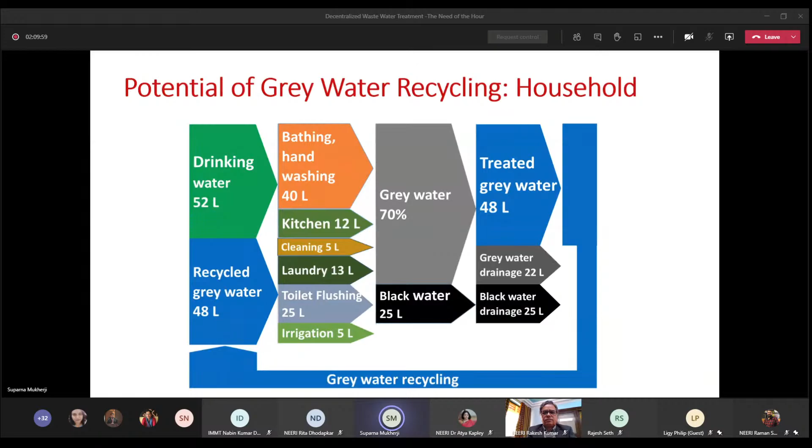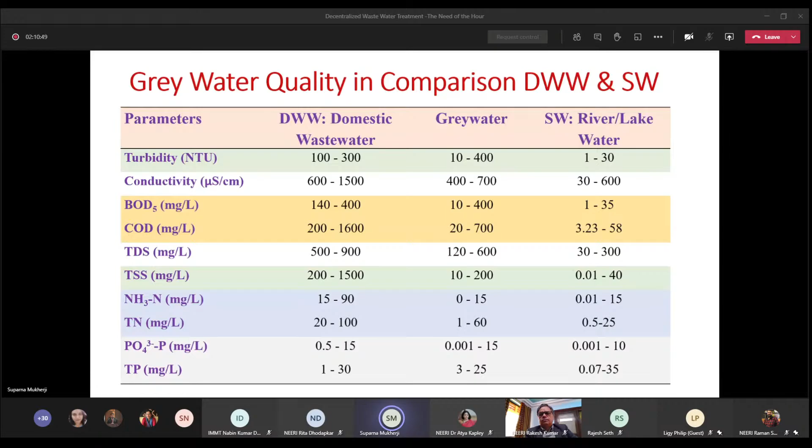And one of the other things we have normally encountered is that the nutrients in grey water is much lower than in domestic wastewater, both in terms of phosphate, nitrogen, etc. And pathogen concentration is also much lower in grey water compared to domestic wastewater.

Now, when we think of treating the wastewater or grey water for reuse, the immediate thing that comes to mind is, what is the treatment standard that has to be met? And in this regard, we find that the standards are again very country specific. It varies from one country to another. And there is also...

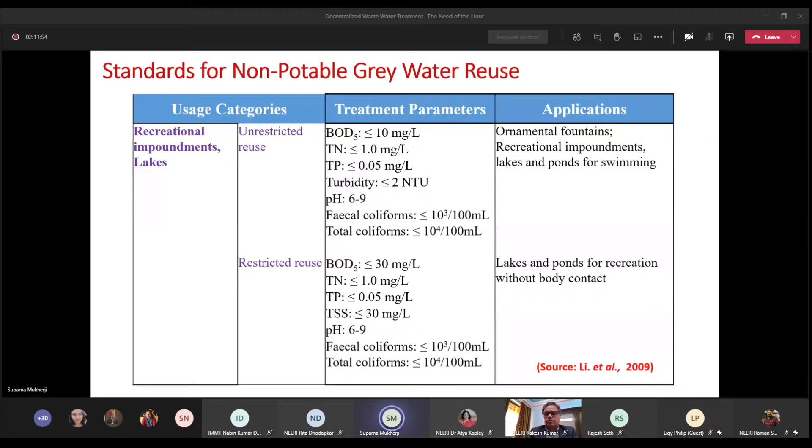...a category of use-based standards. So here I'm showing some category of use-based standards reported by Li et al. For non-potable grey water use, you see that recreational impoundments, both restricted and unrestricted use, there is difference in the standards specified. Some standards are similar, but BOD levels for unrestricted use is much lower than for restricted use.

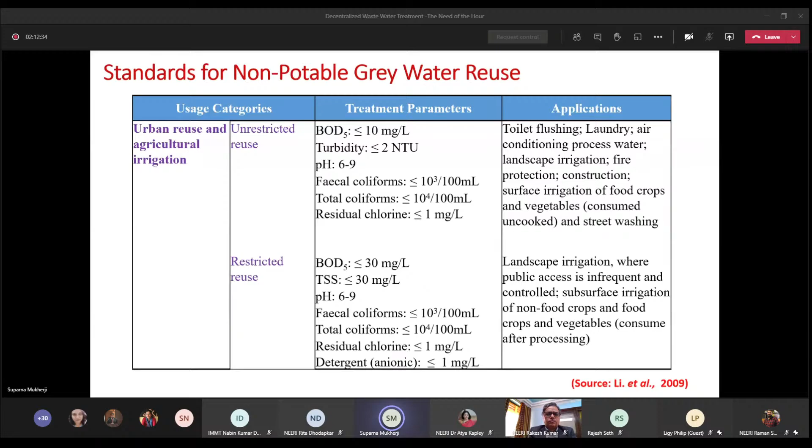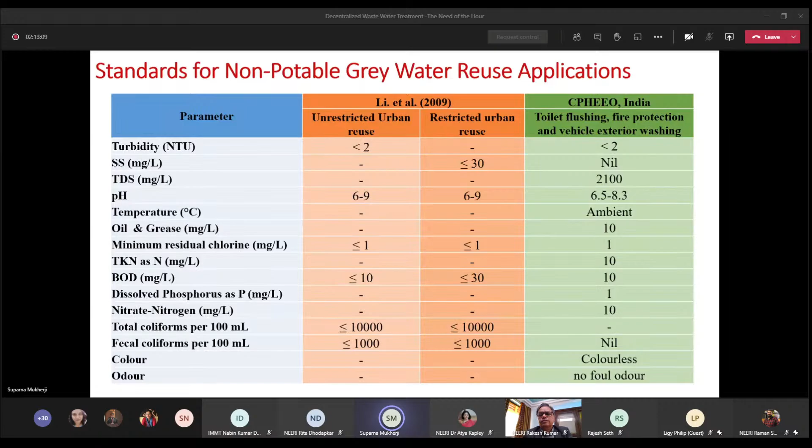Now, just comparing the CPHEEO standards with the standards reported in the earlier paper I was citing, one key difference is in the level of coliforms. The coliform level specified in the CPHEEO standards is nil, whereas here it is 10 to the power 4 for total coliforms per 100 ml and 10 to the power 3 for fecal coliforms per 100 ml.

As we already saw, treatment technology can vary quite a bit. We have seen many examples of treatment technologies discussed today which have great potential and are shown to work well. They can include a combination of physical, chemical, and biological rather than a single treatment technology.

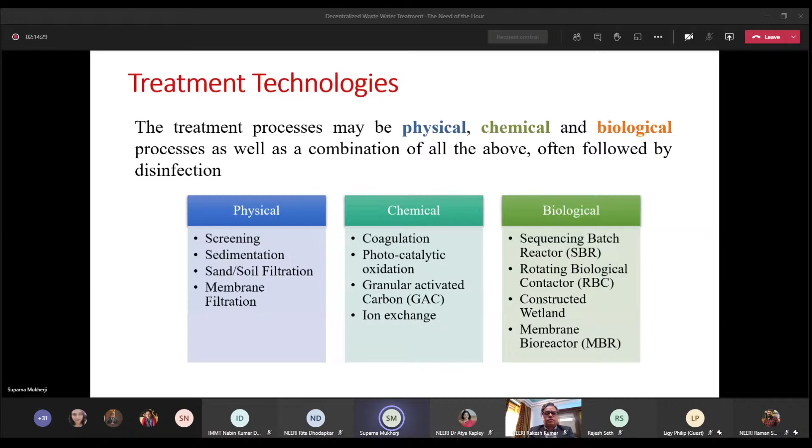In most cases, including biological treatment is required. Only physical treatment for grey water or domestic wastewater would not be adequate. Biological processes like constructed wetlands, microbial remediation through constructed wetlands and other technologies can be very useful. We can also think of bioreactors like sequencing batch reactors, RBCs, and membrane bioreactors that help in significant removal of organic load. Subsequently, this has to be coupled with treatment for removal of solids downstream, and eventually it would be necessary for many applications to include a disinfection step also.

Now I'm just sharing some experiences with grey water treatment that we had in a novel bioreactor. Our motivation for doing this work was that we were earlier looking at some systems supplied for treating grey water generated in hostels, etc.—extensive systems with a lot of units. Eventually we were finding that these units were not working well.

Like Professor Philip pointed out, often maintenance issues are there, and often the operators who are operating the systems are not aware. This is exactly the type of thing we found in some systems we evaluated—the treated water had so much foaming that it did not look like treated water at all. The unit was not being operated properly. This was a sequencing batch reactor not being operated as per the proper cycle, so obviously the treated water was not meeting the quality.

This sort of thing motivated us to try simpler systems without too many units in it. I'm not disclosing much because we are supposed to try patenting this technology, but anyway, this is basically a bioreactor. We just did equalization and tried treating grey water in the bioreactor.

We found that we could get good removal of BOD-COD even when the BOD to COD ratio was less than 0.3 in the grey water. We could achieve good treatment. The water treated was of excellent quality, with good removal of solids along with BOD-COD removal—TSS, turbidity and all were also very low. We had good removal of coliforms and fecal coliforms also.

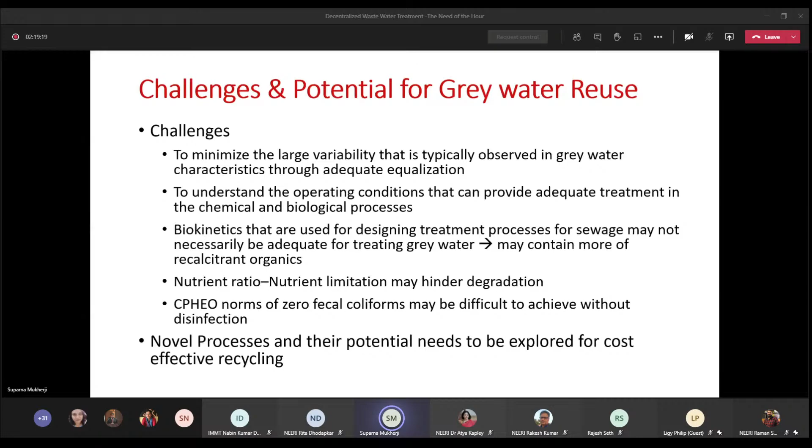Well, thank you very much, Professor Mukherji, for sharing with us your experience about novel bioreactors. And Madam, I very much like your simple thoughts. You said that it's very simple for us to say that we should separate the grey water and the storm water. I think it's very much required, it has to be a part of our town planning now. And I like your point about the capacity of the community to pay during operation and maintenance. It is a very important aspect. I think we construct swanky wastewater treatment plants, but due to insufficient funds, we are unable to run these white elephants. And also the most important thing you mentioned is the social acceptance. Ma'am, we are truly honored with your thoughts, and thank you very much once again for being a part of this panel discussion. Thank you very much, ma'am.

Thank you, Suparna. And now, before moving forward sir, with your permission, can we take a few questions? Yeah, I think since we're calling it a panel discussion, we should take some questions, and then we'll request Dr. Geeta to close as we go ahead.

So the first question we are receiving on the social media platform is, what is the cost per meter of treatment? I think this one is referring to the renew system. Ma'am, this is for you. It has to be per meter cube, I guess. Yes, not meter. I think maybe sir will only answer this, because treatment cost varies with flow, with location, with so many things. So what we did at Prayagraj was per MLD. Because of that region, in NEERI we had a different cost, in Prayagraj we had a different cost. So maybe sir would make a generalized statement.